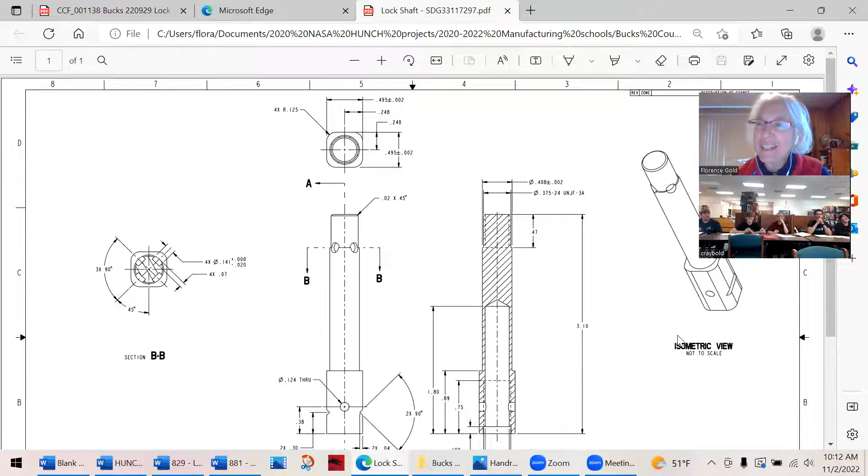Oh, here it is. Do you see the drawing? Okay, so this is a drawing of the part you're going to make, and it is identified by NASA in two different ways. I'm going to try to make this bigger, but you have it in front of you.

Look at the title block. You can look at yours. It's called a lock shaft, and it's part of a handrail.

So where do you think NASA uses handrails on the International Space Station? Or why do we use handrails? To keep your balance. Actually, yes, very much so, to keep your balance, but not only that, but to keep you from flying or doing the Superman thing on the space station.

It's microgravity, so astronauts have to grab handrails to hold on so they don't just float away. Have any of you seen videos of that? Yeah, so the handrails become really important, and the astronauts have wanted more handrails for years.

They have a bunch up there, but NASA didn't have the funding to purchase more handrails, so they asked the NASA HUNCH students if they would make more for the astronauts, and we've sent up about 11 of them so far. But they want more because they really need to grab onto them with their hands, or sometimes they slip their feet under them, and the feet will hold them down to the ground.

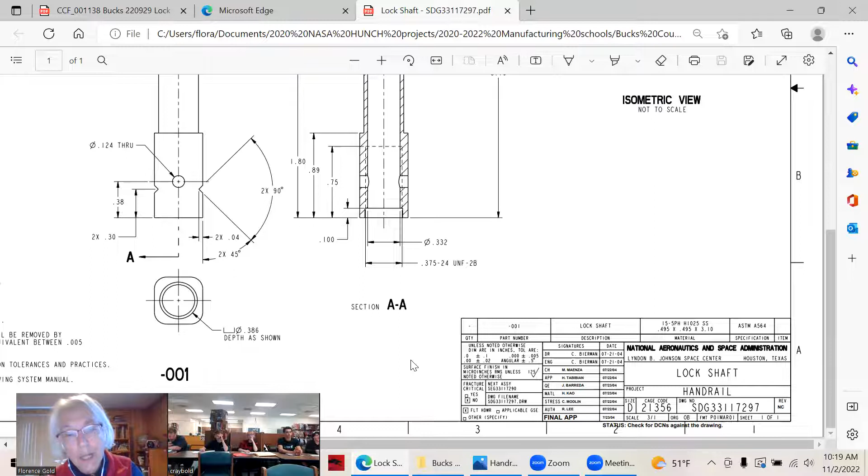Once that rocket blew up, every door got that tape across it so no one could enter that room, because they were going to look at the documentation behind every single part that was on the rocket, including the lockers and the experiments in the lockers, to make sure they could find out what caused that explosion. And because of the documentation, they usually do.

And I'm going to show you, you don't have this in front of you.

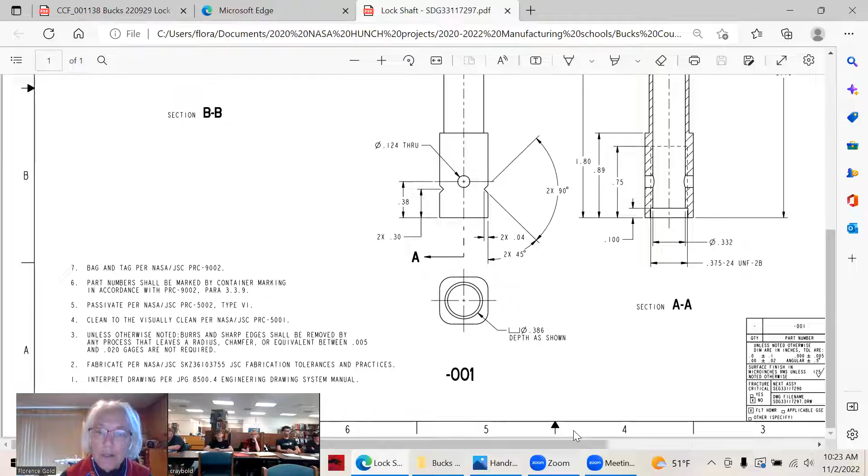What we're going to have you do is - actually I'll stop sharing a minute. So this isn't the lock shaft, this is a tube fixture for the handrail. But what you're going to do is make 6 parts. You're going to put them in a little bag, and your teacher already has these bags and tags. You never write or tag the part itself, only the bag, because we need to keep that part as pristine as possible, because we're going to anodize it in the end.

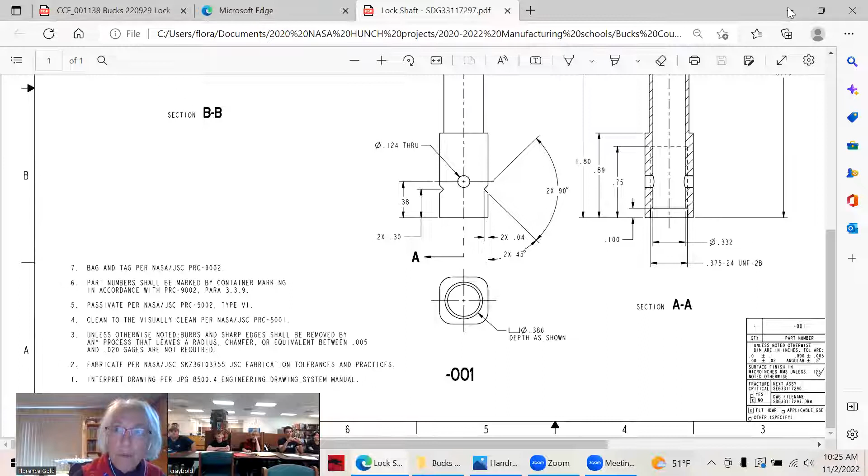But you're just going to take the first 6 parts you make and send them to Houston, and they'll check it. I'll actually show you what they're going to use to check it. Hold on, let me share my screen again. So that is actually a question on the test.

About checking, when you're ready to send your parts into Houston, you bag it and label it, and you have to include several documents. We just looked at one of them, which is the cert. We're going to look at the other 3. There are 4 documents that have to accompany your part when you send it to Houston.

But there are 4 documents that have to accompany your part: the drawing, which we just looked at, and form 881 - it's actually called the sub-assembly process sheet, but write down form 881. This is a question on the test: what are the 4 documents you need? This is the hardest question on the test, actually.

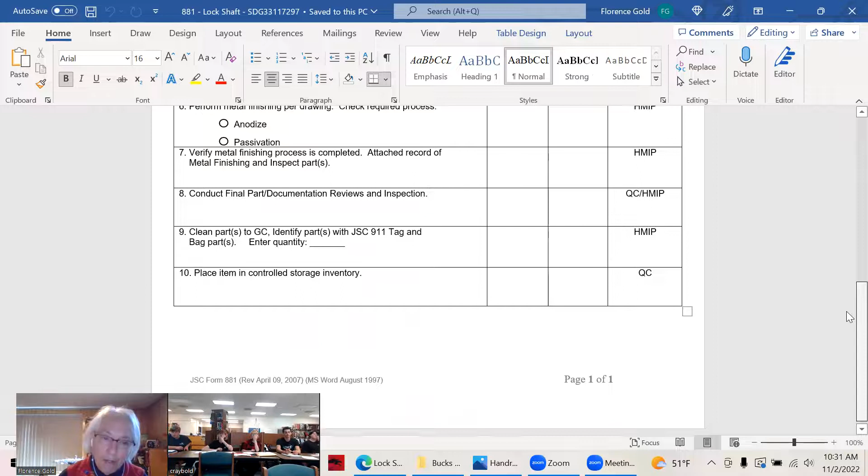It must accompany your parts, but as we just saw, if you look at the bottom, it will say JSC Form 881, and I like to call it Form 881. So here's some questions that are on the test: you can only use black or blue ink on this form. This is a legal document, and any legal documents only use black or blue ink. You cannot use pencil, you cannot use orange or purple ink, and you cannot use a marker, a Sharpie. Only black or blue ink.

Another question on the test is, do you have to put the complete date - the month, the day, and the year - on this document and any of your documents? Yes, you have to put the complete date, including the year. So I'm going to put that in here for us. I like if you put it this way: put the whole year 2022, put the month, the day, and the year. And I'm going to copy that, and I'm actually going to highlight it.

So remember that, that's a question on the test: do you need the year? I've seen the people at Johnson Space Center go through a book like this, filled with documents for our parts, and she'll look at every page to make sure we have the year on it too. And if we don't, we have to go back and figure out what year it is.

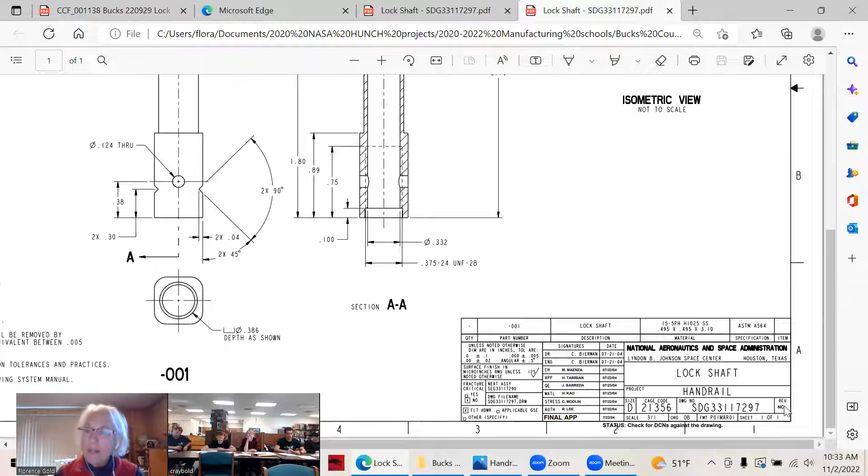See if I minimize that and go to this drawing. Yeah, so let's see if we can, yeah, it's right here by the drawing number. If you look on your

If you look on your drawing, it says REV stands for revision, NC is no change.

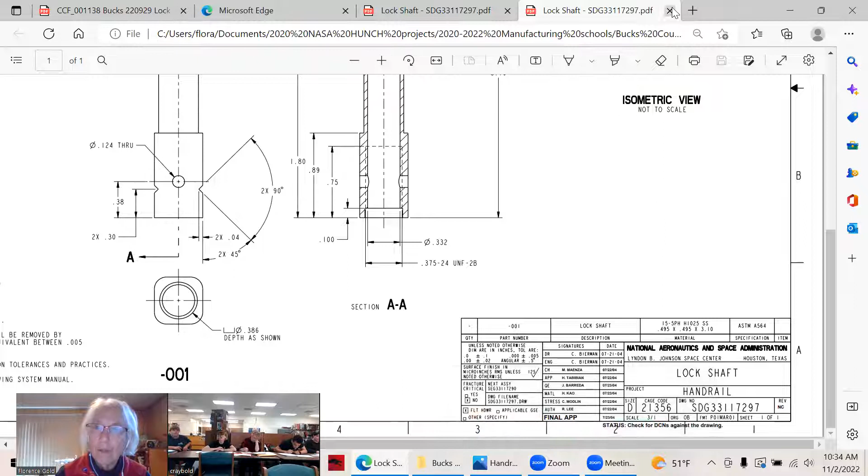So that's the first question on our get rid of that. Get rid of that. Whoops. Not sure why that come up. I'm gonna get rid of that. I'm gonna get rid of that. Just trying to clean it up. And back to this form.

All right, do you see this form again? Yes. Okay, so in here you're going to put NC, because that came right from the drawing. And NASA always likes two people working on any of their parts or their documents.

So here you're going to date it, just like with the year again, but one person's going to be the tech who actually probably is working on the part, making the part, and then one of you will be the quality control person, the QC person, and they will have a stamp that looks like this. Your teacher already has these stamps, and I think he has several of them.

So the QC stamp is, instead of your signature, you're going to be assigned a stamp. You cannot share this stamp. That's a question on the test. No sharing the stamp. It's like your signature.

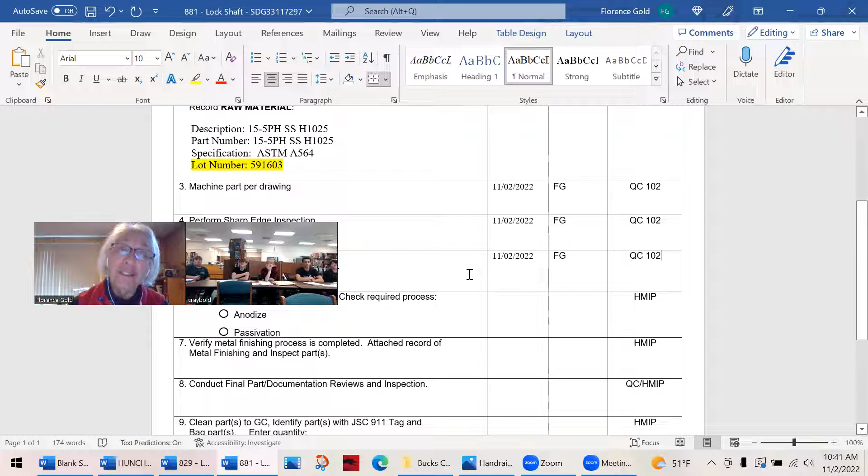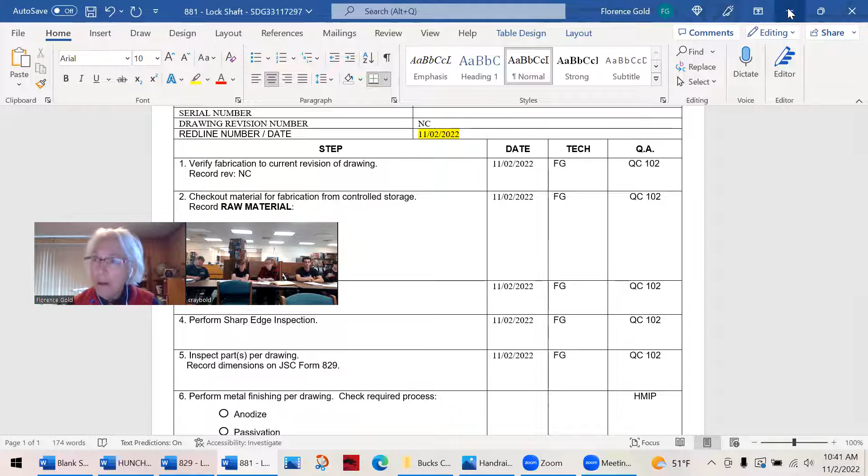We just have one more form to go, and this is a very important form, believe it or not. That's a really important form, that you do it as accurately and neatly as possible. All right, so this last step says Form 829, and you should have that form in front of you. It says dimensional inspection. Yeah, we have it.

Okay, so I'm going to pull that one up. I'm only going to pull up page 1, but there's 2 pages. That's a lot of work, because now that you manufactured the part, you have to inspect each of those little dimensions that were called out on the drawing.

So if I had to rewrite my test, I would ask a question. It's not on the test, but it's so important it should be. I might have to add it. That the drawing, write this down, the drawing takes precedent over any of these measurements or tolerances on the Form 829. The drawing takes precedent. The drawing is the right information. This might have something different.

And it does, actually. So you got to be really careful. What I want you to do is keep the drawing in front of you when you fill out this form. Does that make sense? Yes. Yeah, because the drawing is the part that has this information correctly. And this actually, it lists it.

So some of them do list tolerances, but some of them don't. And when they don't, they say to use the tolerances that are on the bottom. You see the blanket tolerance thing? Yeah. So if your drawing doesn't have a tolerance, it should say plus or minus, and everything at NASA is in inches. So we as machinists think of it as thousandths of an inch. So this would be 100 thousandths of an inch, 20 thousandths of an inch plus or minus, or 5 thousandths of an inch.

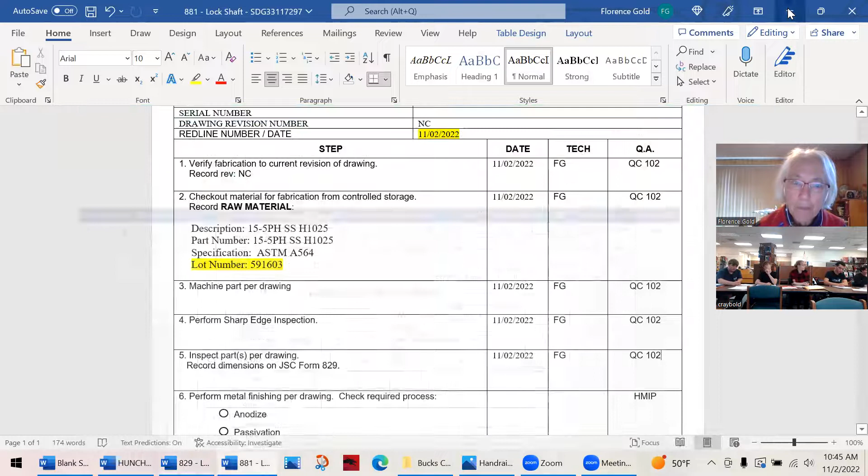It will have the name and the drawing number for you already. And we'll go over each of these columns. So the print zone, that's how you locate something on the drawing, C8. And usually I'll pull up the drawing again.

So let me make it a little smaller. Oh, that was kind of small. But you see across the row across the top has numbers. That's like the x-axis, and the letters are like the y-axis, and it's used to locate things on your drawing. So if you wanted to locate this angle here, it says 3x. 3x means 3 times 90 degrees. So there's 3 angles there that have to be 90 degrees that you have to measure.

And it would be in, well, C, and I would probably say they're going to call it C8, because the number is more on the 8, even though the angle is actually in 7. But we'll see. Any questions on how to read that?

That's like your Cartesian plane. Are any of you taking geometry now? Yeah, I took it last year. I'm taking it... Yeah.

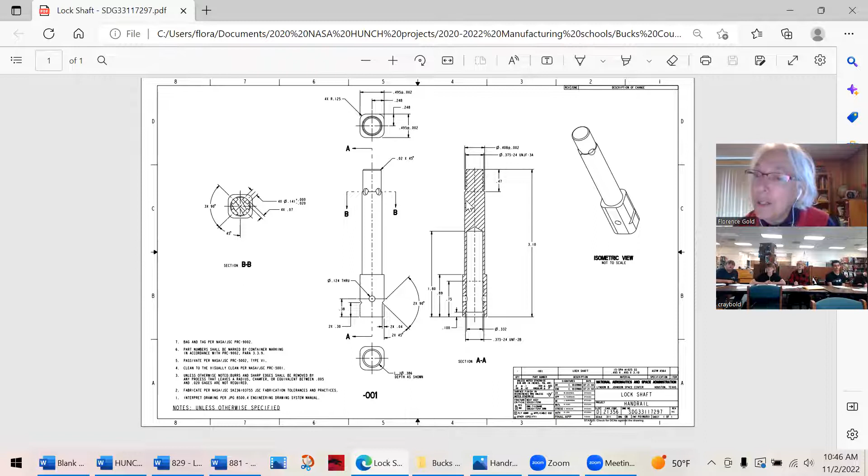That's great, because then you're very familiar with using the X and Y axis to locate points, right? Yes, and that's exactly what we do in drawings. I wish when I taught geometry in high school, they'd say, when are we ever going to use it? Well, here you do, you use it in manufacturing. How awesome is that?

So that's the first column. I'll put this up. It did say, there it is, C8, 3 measurements that have to be 90 degrees. Do you think you can put 3 measurements in this cell? Probably not, and look here, it's 4 measurements. So what I want you to do, actually, you probably could fit 3, probably can't fit 4, if all of the measurements are 90 degrees and they're all in tolerance.

You could just put one of them down. If one of them isn't in tolerance, put that one down. So if, let's say, 2 are in tolerance and 1 isn't, I want you to put the one that's not in tolerance down and highlight it in yellow. That's a question on the test. If something is not in tolerance, write it down. We're not throwing out the part yet, because maybe we can still use it, but write it down, highlight it in yellow.

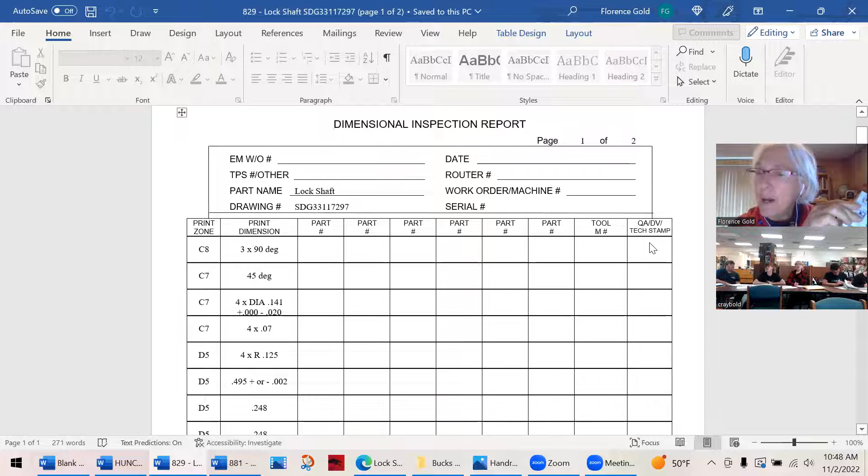And the final part of this is somebody will be the quality assurance person, and they can use a QC stamp, or there's another stamp called LM for linear measurement. You can use QC or LM stamps on this form. You can't use an LM stamp on form 881, but you can use an LM stamp on this form only. But you can use a QC, that takes precedent over both, so you could stamp it QC or LM.

But do not stamp it if any one of these parts is not in tolerance, because when you stamp this last column, it says everything is good to go. So highlight a part that's not in tolerance in yellow, and do not stamp the last column. That's a question on the test.

And with this one, the 4 times diameter, what I would do is, if you have 4 different readings, which could happen, maybe you won't, you'll have all 4 the same reading, but if you have 4 different readings, I'd put the low one that's still in tolerance and the high one that's still in tolerance. Don't worry about the other 2 as long as they're in tolerance. If one of them isn't in tolerance, put that one down and highlight it in yellow. Am I being clear on that? I'm not sure, are you all right with that?

Okay, and you know how to add or subtract the right amount of tolerance? Because that's a question on the test. To read a caliper, do you know how to read a caliper? Yes, yes. And to figure out its tolerance, plus or minus? Yep, okay, yeah, we get given calipers.

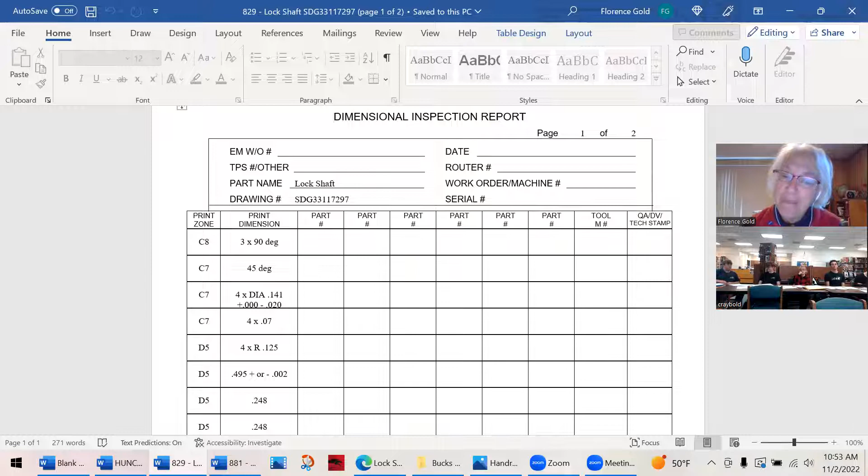That's my advice. It's not a question on the test, but just keep checking your measurements. The quality assurance person is your best friend, even though you might think it's your enemy, because they're always at you checking your part, but they are the best friend. I've had several students who have been quality assurance people for this HUNCH program, and they've gotten jobs right away as quality assurance people. It's still working with your hands like you like, but you're at everybody's... not exactly their friend, because they don't want to hear that something's off measurement, but things are off measurement, especially when you're making a lot. So really, you should thank the quality assurance person.

All right, any questions? No? All right, so now I'm gonna share my screen again. I'm gonna call up the test. So you have to get 100 on this test.

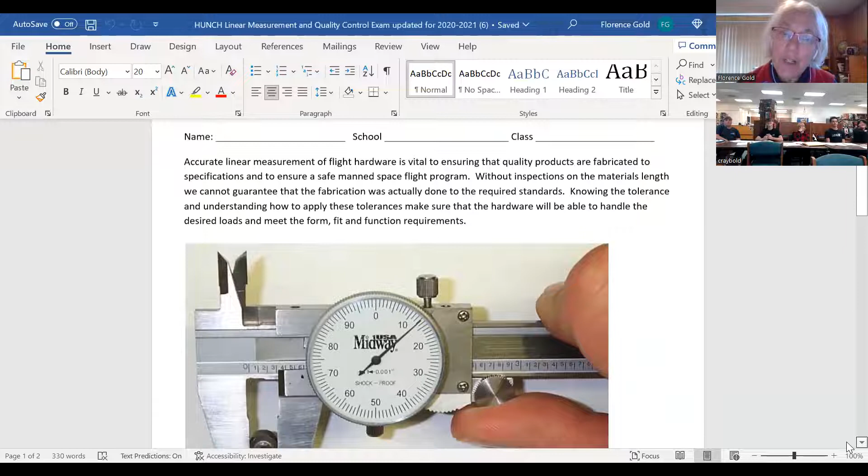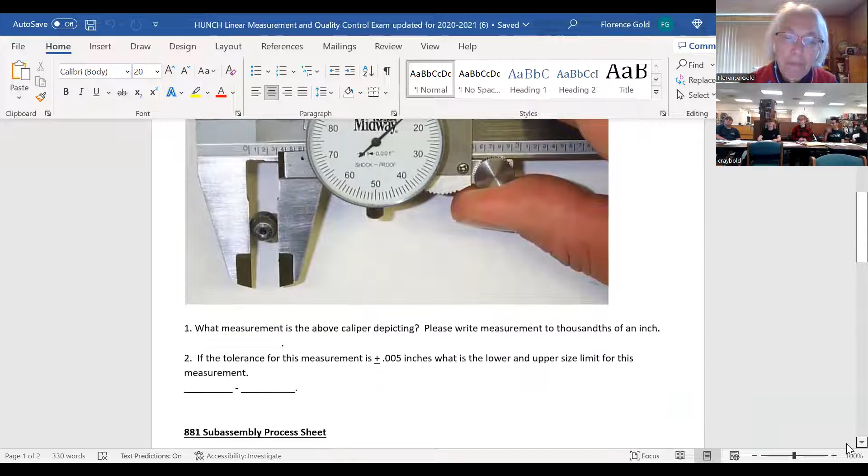And the first question is about, do you see the test? Yes, okay. So the first question is about this little tiny nut. We're measuring the nut, and I didn't go over how to read that caliper. I'm not sure you have calipers that look like that. Do you have calipers that look like that? We do. So that's the first question. I just want to make sure I've gone over everything.

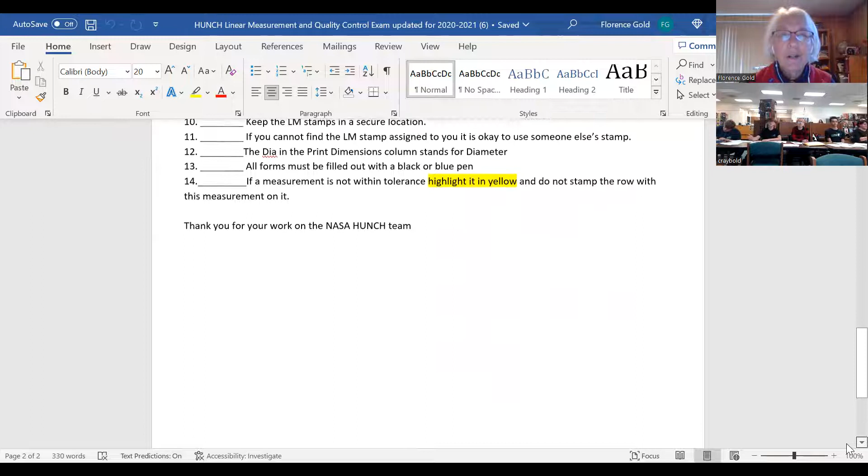So keep the LM stamp and the QC stamp in secure locations. Okay, so I think I've gone over everything on this test, and we're going to grade it right away. But ask questions if you have any question about it.

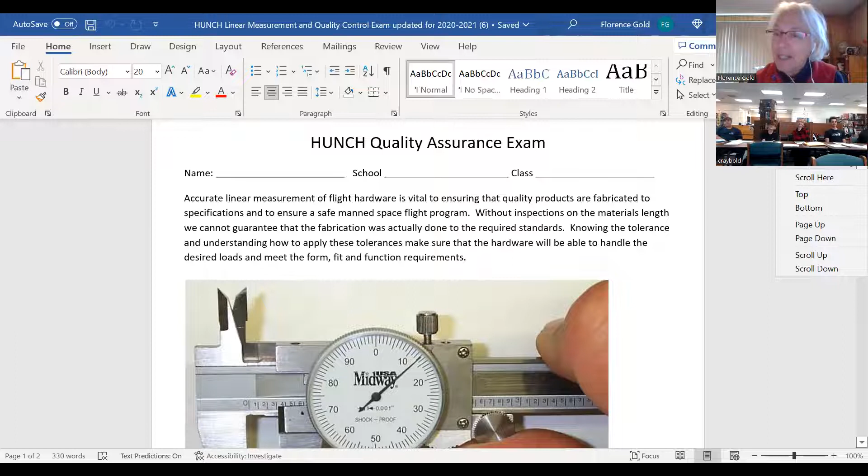Everything has to be made by hand for this space exploration. Sorry, that's a little side note.

All right, let's go. Why don't each of you take a turn? Let's start with Justin. Justin, read question 1 and 2 for me, and the answer. What measurement is the above caliper depicting? Please write the measurement to thousandths of an inch. I got 0.313. Okay, perfect.

Number 2: the tolerance for this measurement is plus or minus 5 thousandths of an inch. What is the lower and upper size limit for this measurement? I got plus 0.318 and minus 0.308. Perfect. Everybody get that? Because I didn't really go over it.

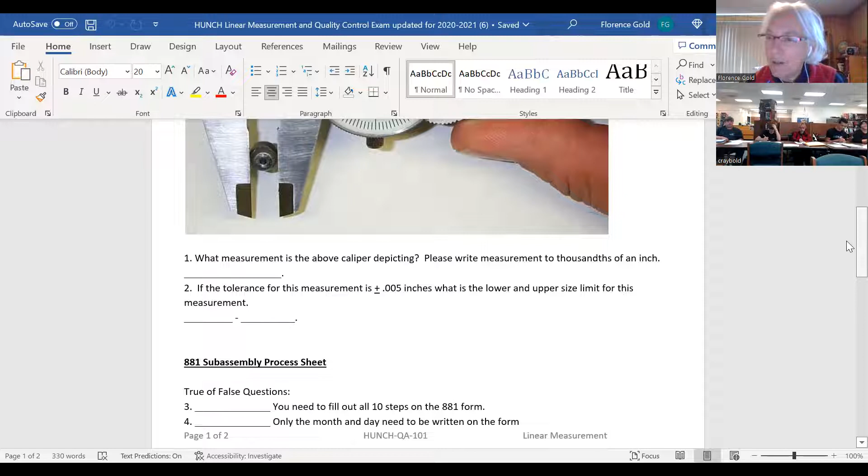Okay, good. Now here starts, and look, it's right on the form. That's a test-taking skill: look at the information on the form. I'm telling you, form 881, sub-assembly process sheet. True or false? I'm giving you that information.

So is it Kevin? Yeah. Kevin, read questions 3, 4, 5, 6, 7. You need to fill out all steps on the 881 form. I said false. And why is it false? You only have to do the first 5. Right, good job.

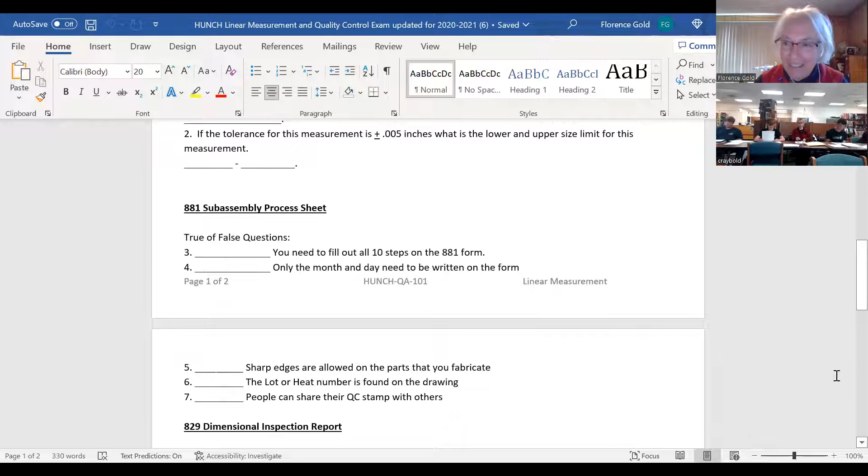And then, only the month and day need to be written on the form. I said false for that, because you need the year. You need the year.

Go ahead. Sharp edges are allowed on the part that you fabricate. I said false. Why can't we have sharp edges? Because if they're holding on to like the handrail, they don't want to get scraped on their hand.

Yeah, good. The lot or heat number is found on the drawing. I said false, the lot is found on the COC. Right, good job. People can share their QC stamp with others.

I said false. Why not? You have your own one, and if you share it, it's going to be like someone else's stamping. Yeah, it's like your signature.

All right, Sarah, this is the hardest question on the test. What are the 4 documents that must be included in the shipment of the items? I said Form 881, Form 829, the drawing, and certification of conformance. Awesome, that is the hardest question. Did everyone get that right? Yes. Yeah, okay, good.

All right, so Jay, you do from 9 to 11, and we'll let Layla do from 12 to 14. Each part should be placed in an individual bag with the proper label on the bag. I said that's true.

Number 10: keep the LM stamps in a secure location. I said true as well. Number 11: if you cannot find the LM stamp assigned to you, it's okay to use somebody else's stamp. I said false. Right, it's your signature, you don't lend it out.

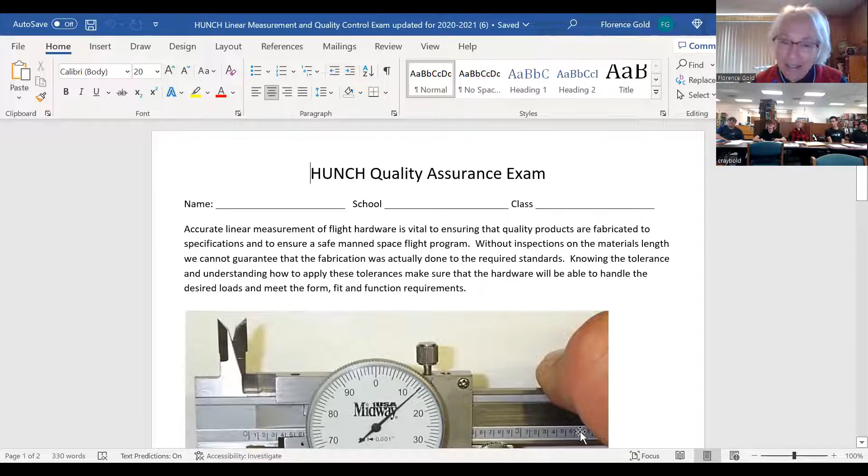All right, so any questions? You need to brag about this, not everyone gets 100 on that test. So you should be very proud of yourself. It was easy when you listen, right? Yeah. So that's why your teacher selected you.

All right, would you like to watch a really cool video about what you just signed up for? Yes, sure, yes. Okay, hold on, let me see if I can get it. It's 20 minutes. It says I can't, it's 20 minutes. Let's see if we can go to our desktop. Hold on, I want to go to our desktop. It's on our desktop. Susan.